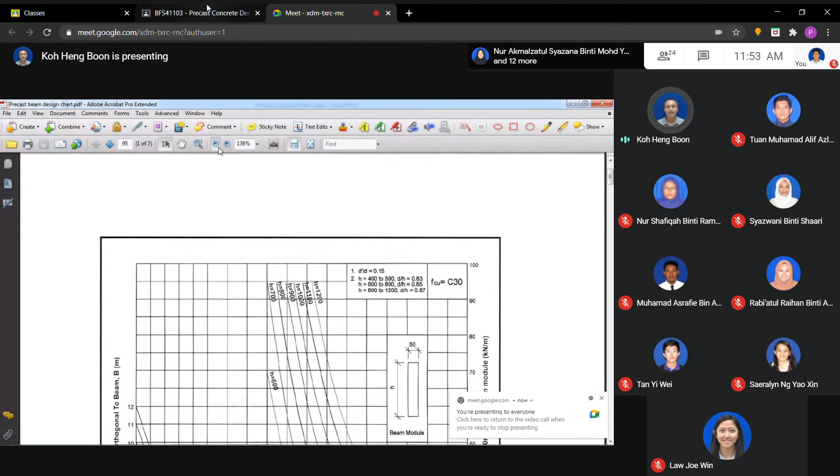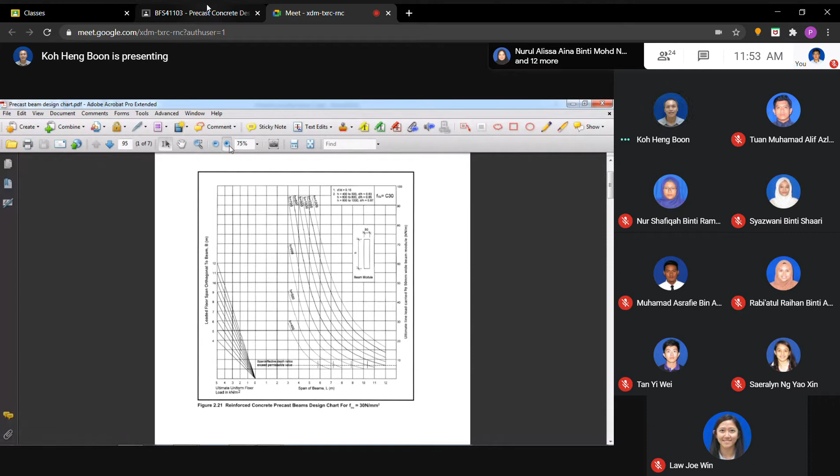There's a handout, these are the design charts. How to use this design chart? First of all, if you look at the design chart and enlarge it - this one is FCU, the concrete cube strength. 28-day cube strength, we got grade 30, grade 35, grade 40, and so on.

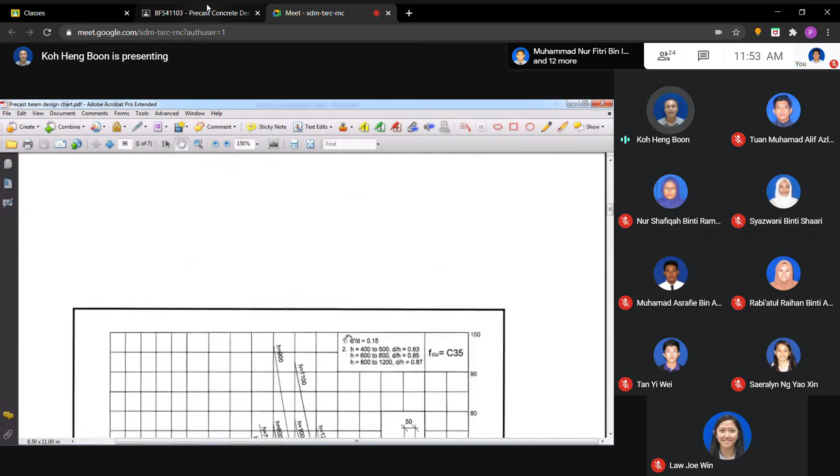And this one is the beam module. Beam module means that here we are all based on, after this, a 50mm module. Based on 50mm here, based on 50mm beam module - it means something like this. After this we get the 50mm. So one way is like this: we are going to estimate, based on 50mm, what load it can sustain.

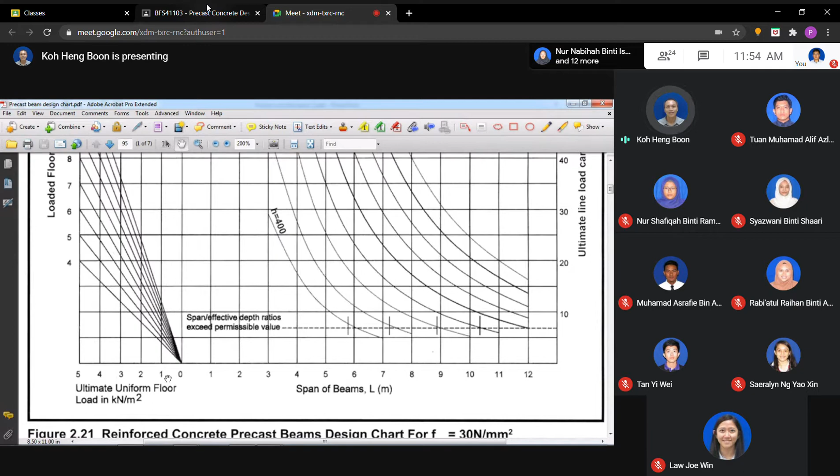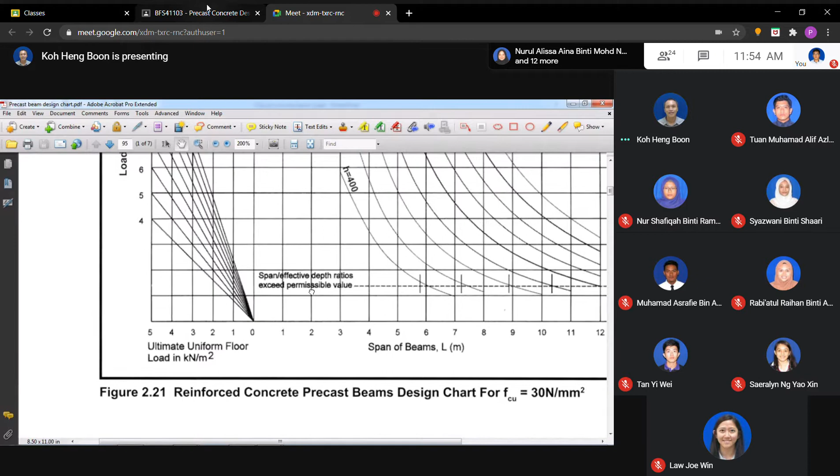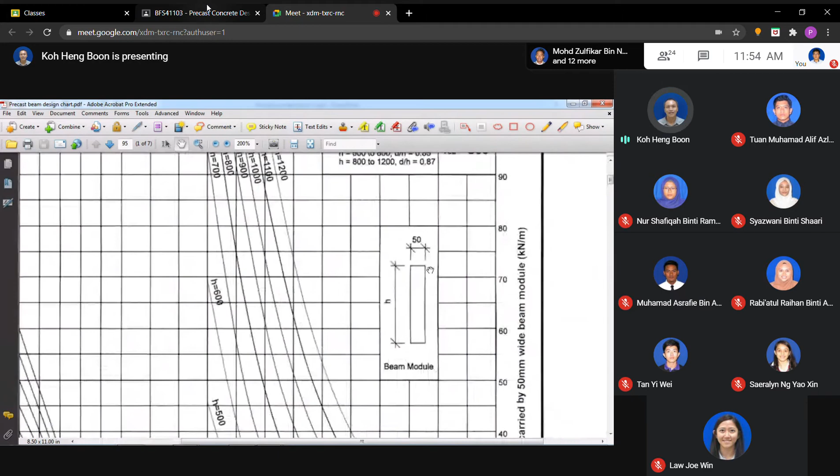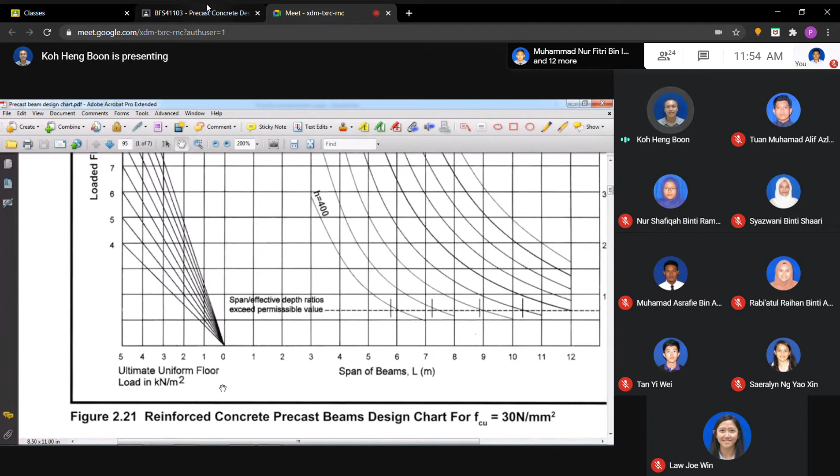Kilonewton per meter square. For example, let's say based on 50mm, at the end you get 1 kilonewton per meter square. So if your load, from your calculations for the design load, is 6 kilonewton, which is 6 times the 50mm beam module - meaning if 50mm can sustain 1 kilonewton per meter square, and the actual load is 6 kilonewton, you have to provide the width. If 50 times 6, the width of the precast beam must go up to 300, that's 6 times. So this is one way we use it.

This is the span of the beam - very straightforward. If the span is 7 meters, then this is the height, h is the depth, the depth of the beam. Let's say the span is 7 meters, the depth of the beam, let's say the depth is 600.

Okay, you got 400, 500, 600, 700, 800. Then go here, you have to know what is this. Actually this one is the floor, your floor, loaded floor span.

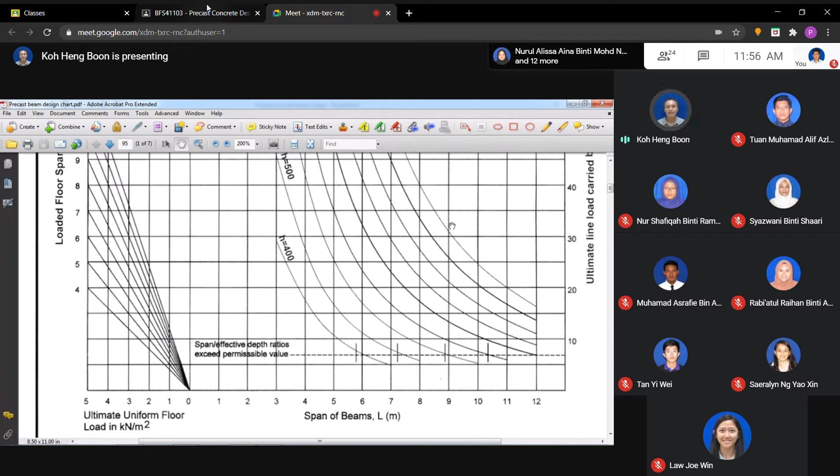You go here, let's say is about 6 meter. You touch here, so you can go about 2 point something kilonewton per meter square. So if your beam is 6 meter, the load on your floor is 6 kilonewton per meter square. So it's 6 divided by this value, then you will get what is the B, the actual B. Okay, so H, this is H, this is H.

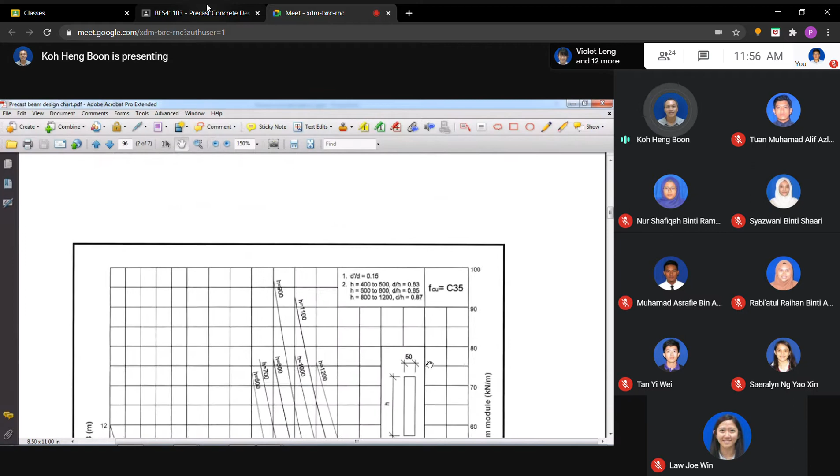Okay, never mind, we will see how to use it. So this one is for grade 30, figure 2.21, then 2.22 this is for C35, grade 35. This is for grade 40, all based on beam module 50, beam module 45, okay, 50.

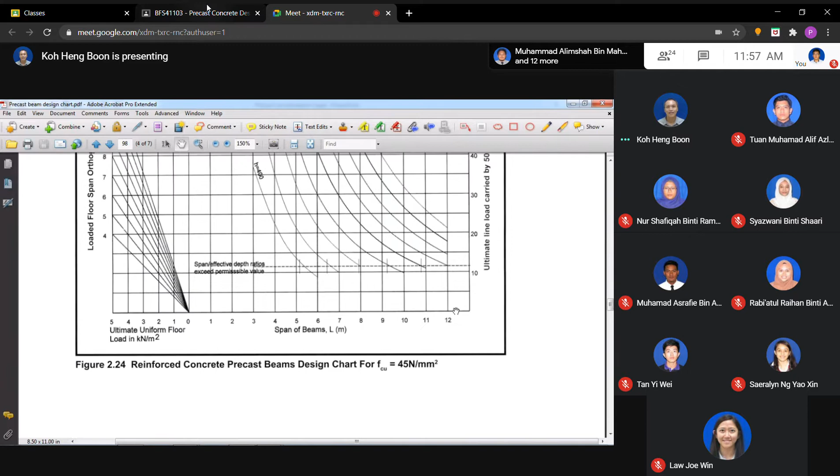And this one, actually either you want to use it or don't want, this one is for what, to get the reinforcement, AS. Once you get the size, everything, actually you can go back to what you have learned.

You then say this is based on normal reinforced concrete, okay, normal reinforced concrete, but actually we cast in the factory. So this one, to get the reinforcement, how much reinforcement we have to calculate M over BD square, FCU, and so on.

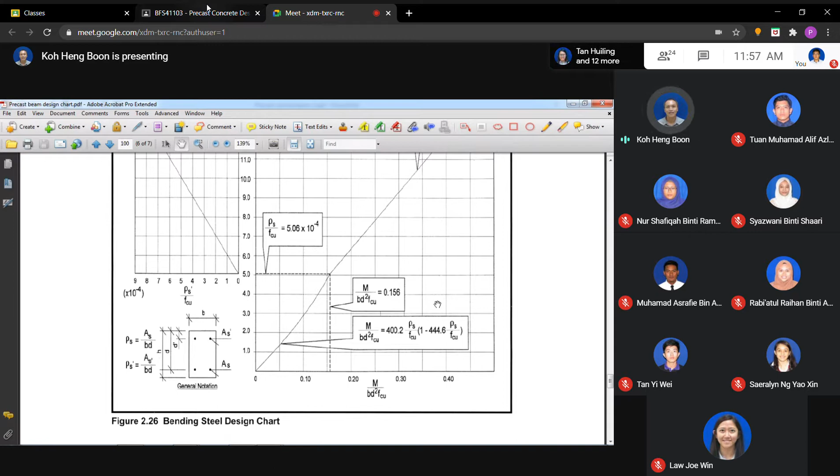But you can go back, actually calculate the K, calculate the Z, and then you can get the AS prime and the AS. But in here it gives you more straightforward, you just calculate the M over BD square FCU directly. You can project it out, and then you can get the percentage of the tension reinforcement, and the percentage of the compression reinforcement required.

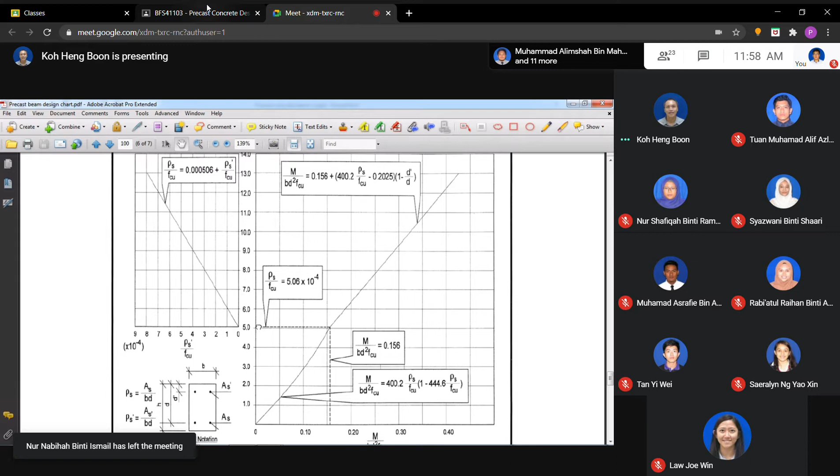Okay, this is the design chart here. Then this is for the shear. This one is based on BS 8110 for shear, to get the concrete shear strength, basically to get the concrete shear strength. Okay, we'll use it, see how.

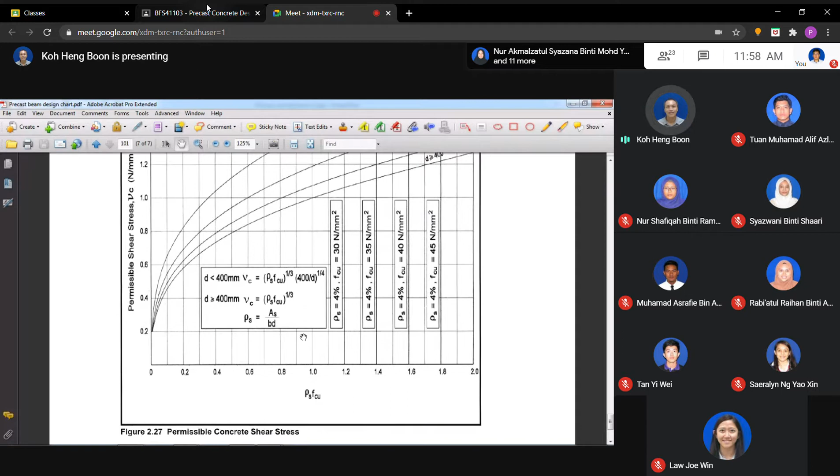After this we'll see how, okay, how to use it. Okay, yeah, basically from 2.21 until 2.25, all are the design chart, for us to get the suitable sections or loading. Then 2.26 is to get the reinforcement, 2.27 is the link, for us to get the link.

Okay, so I have given you this one because in the slide it's a bit not very clear, sometimes it's not very clear here, it becomes a bit small. Okay, a bit small, so now at least today we can look at one example, then coming one we can look at another 2 examples. We target, actually, is it possible by 12:30 we can finish, not drag until 1 o'clock. A bit tired, I'm quite tired here.

Okay, so now let us look at it, let us look at it. Okay, look at this example. We have a floor, we have a layout. Here is the typical layout of a precast building in figure 2, in this figure, figure 2.

And these are the data given, the data given, the design loading. Okay, you look at the floor here, look at the floor here. Center to center of the column is 8.4 meter, is it? But however, the column, the size of the column is 400 mm square.

So the actual span of the beam actually is 8 meter. Okay, if you cast a beam, actually is 8 meter, is it? Because this is 400 square, 400 square. And the spacing here, this is the one-way slab. Either the slab is a hollow core slab, 325 mm thick hollow core slab, plus 75 mm topping.

So your beam goes this direction, all in this direction, and the slab is going to be put in this direction, meaning that it's supported here, left and right here. Okay, so we are going to design one of the span because it's simply supported.

First of all, it's simply supported. We go for a few cases. The first example for today, we go for the simply supported case here.

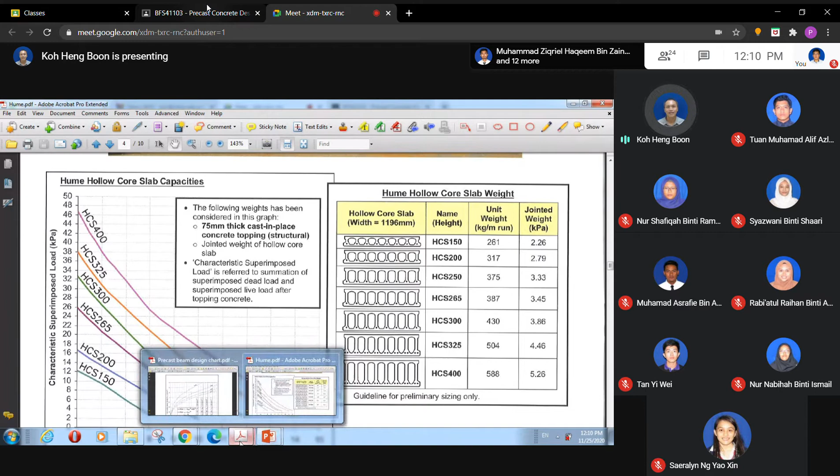Yeah, I think different a bit lah, but it gives you jointed weight here in KPA, 4.46. What you use in this example is 4.5 lah, 4.46 is how to get this value, okay, how to get this value.

So basically this is from the catalog. If you work in a consulting firm, especially when you work outside next time, you have actually a lot of information. Some are actually from the manufacturer, they will provide you. From the catalog, from the handbooks, you can try to find out. So it's not very far different one, okay?

Not very far different. So this jointed weight, just as I mentioned, jointed weight is 4.5, 4.46, is it? So we round off to 4.5 kilonewton per meter square.

Topping 75 mm, based on unit weight of 24. So 75 mm, 0.075 times 24, you get 1.8 lah, you get 1.8.

Finishes 1.2. Okay, given services 0.5 and partition is 1. So the total dead load is 9 kilonewton per meter square. Okay, 9 kilonewton per meter square.

Okay, so and then how to get the depth? Now the depth, no problem already. The depth I already just briefed to you, because we have limited to 700.

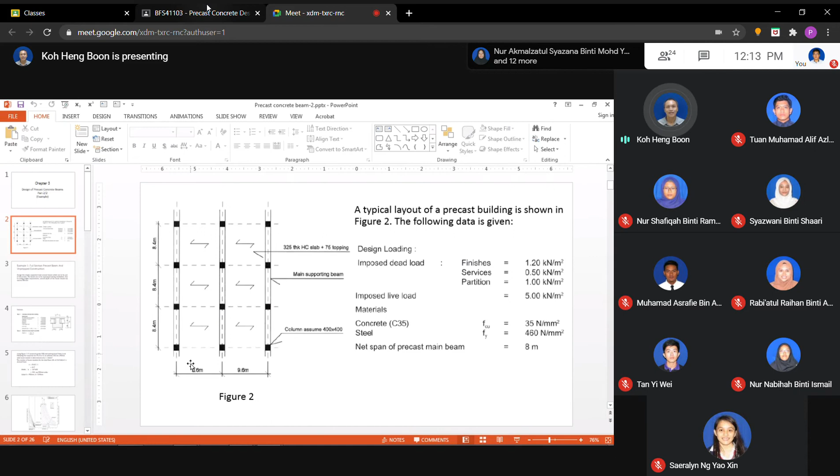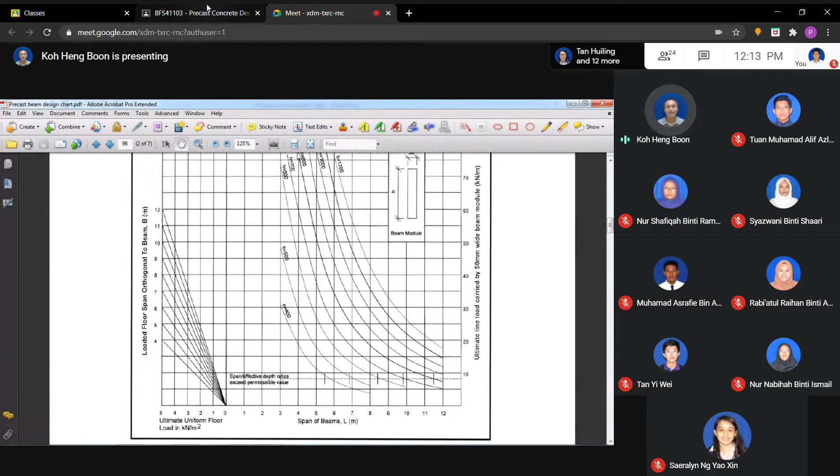So how to go? You go to the table. We only based on 50 mm module. Grade 35, is it? So grade 35 is basically figure 2.22. Okay, figure 2.22. So how to start? You go from 8 meter, is it?

8 meter plus 8 meter is here, is it? And the depth is what? The depth of the beam is 625, is it? The first one is 400. Okay, 500, 600, so in between 600 and 700. So 8 meter, this is 4, 5, 6 here, somewhere here. 8 meter,

625, so 625 you get a point here. Then use the ruler, go here. Where? 9.6. Just now the span, the floor span, the floor span is 9.6. So go up here.

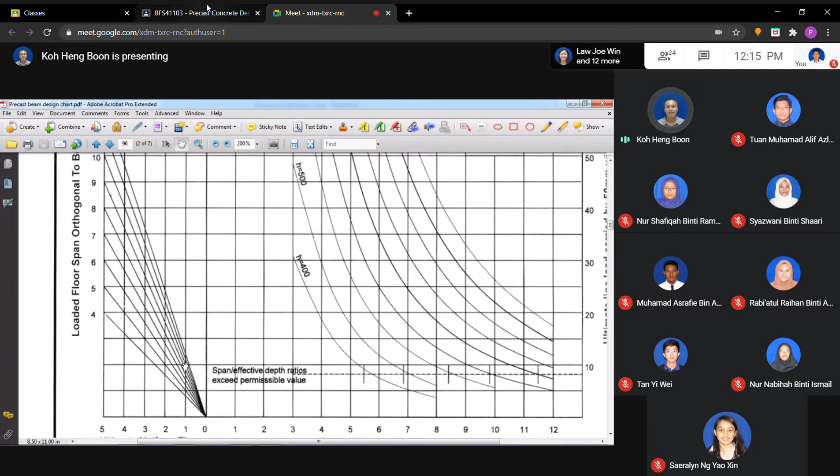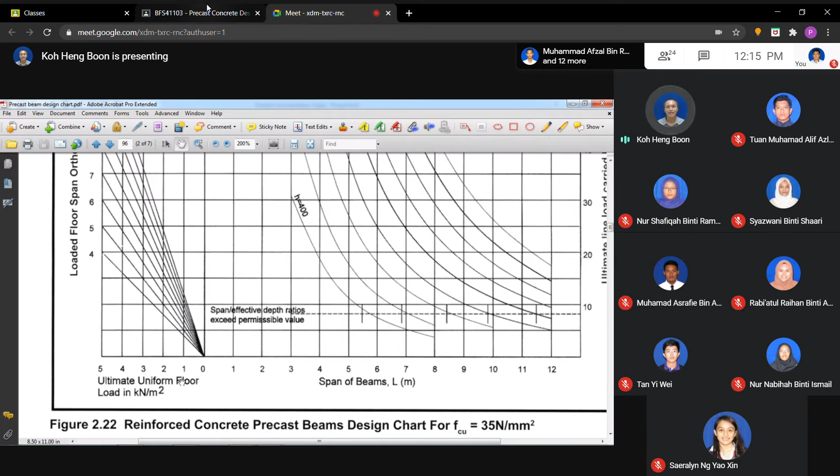Okay, go up here, then 9.6 is somewhere here. You've got 8 on the right, left hand side, the vertical. Okay, 4, 5, 6, 7, 8, 9 there. You touch on it, and then you go down, you get what is 1 point something. I think 1 point something. The ultimate uniform floor load for 50 mm is 1 plus a bit. 1 plus a bit. So we have what?

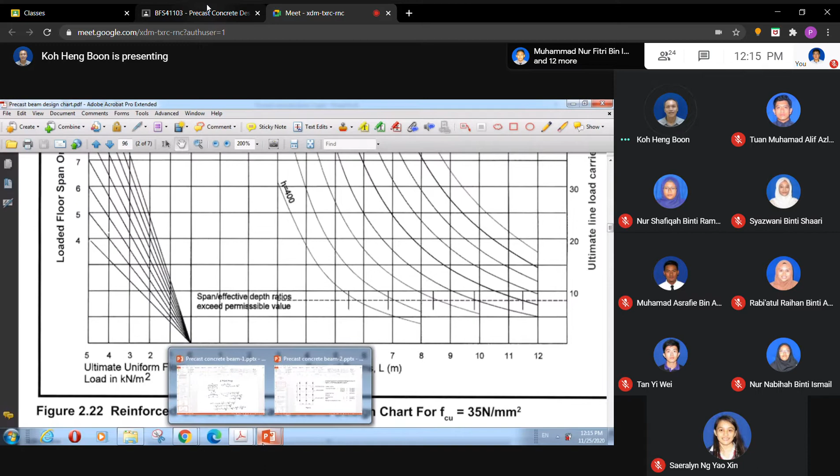The load we calculated is 20.6, based on 50mm. So we have 20.6 divided by what? By the ultimate load, based on 50mm module. So let's say we get a figure, okay 5. Then 5 will be times 50mm each one.

From the sequence just now, A, B, C, D, you get 1.1. So 1.1 here, the ultimate total load is 20.6. So 20.6 divided by 1.1 from the table, we get the value. The N here we require is 18.7. 18.7 multiplied by each one is 50, so it's 935, say we go for 950. Therefore we get the dimension, this is 950.

950. So this table, how to use this table is after this, we use this table the same way. We are going always to use the table. So class, can you get it or not? Before we proceed with the use of the table, understand or not?

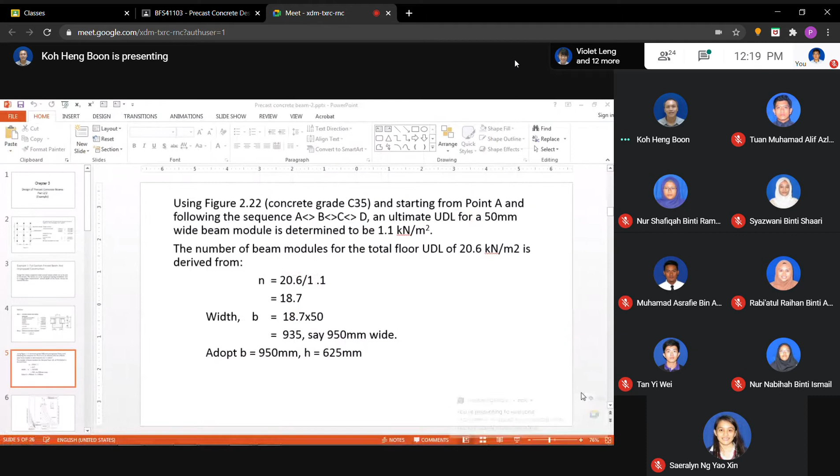So after we get the section ready, dimension settled already, now we want to design the reinforcement. This one I already explained just now because this one is not very clear, that's why I showed you just now the PDF form. So step number 3, we already got the section ready. The next one is we are going to design the main reinforcement and then design for the shear reinforcement. For the main reinforcement, first of all, we calculate.

Now we know the dimension of the beam. We can calculate the weight of the beam, is it? 0.95 times 0.625, okay. We are calculating because it's an inverted T, is it? This is 0, just now this is what we use, 950, is it?

950, we're going to use this one, 950 for the B. So 950 multiplied by 300. Then we have also this part, 150, 2 times 150 times 300, is it? Then we have also 950 times 325, is it? So this is how we get all this. Actually this one is even easier, it's 950 multiply the total depth here, you get this part, rectangular section at the middle parts. Because this is 625 plus this one and this one.

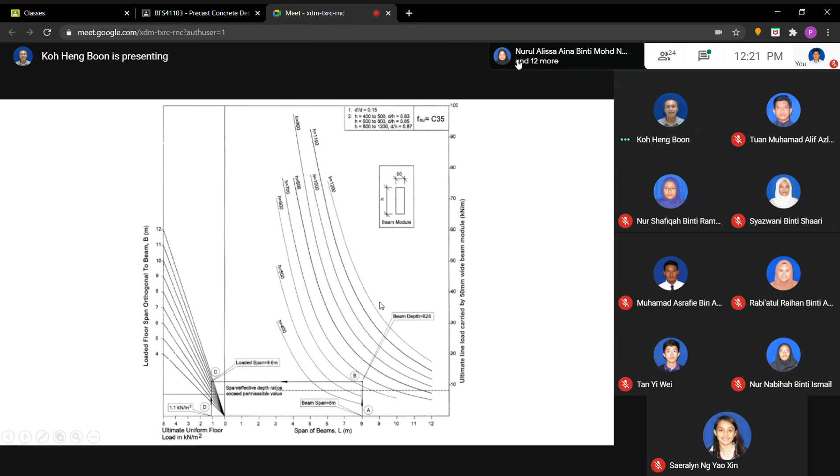So we get 16.41 kilonewton per meter run for the beam. It's a very huge beam, 16.41, you imagine, 16.41 kilonewton per meter run, it's a very huge beam. Consider because it varied the width, the width, because the depth is restricted to 700, therefore no choice here, we have to go wider.

And mid span, and it supports the very long span of the slab, hollow core slab, 9.6 meter. So and mid span is 1.4 GK for the beam, plus this one 20.6. 20.6 is already calculated just now, is it? 20.6 is already factored, is it? We factor 1.4, 1.6, we factor, this is in terms of pressure, is it? On the floor, is it?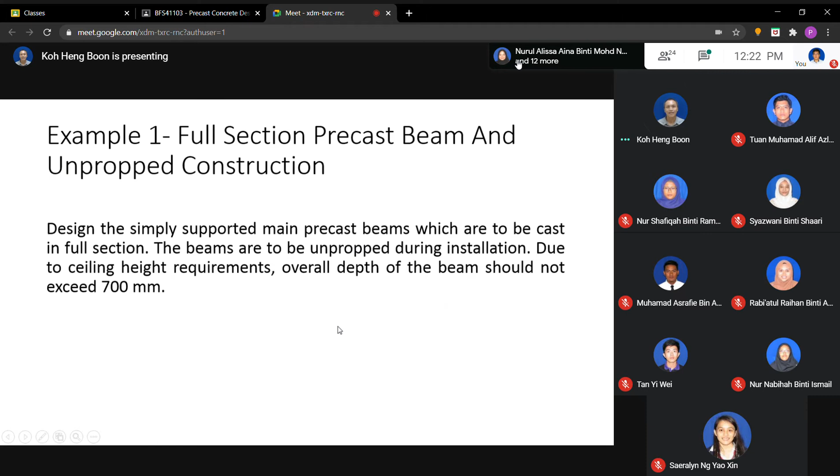So this one, 20.6 kilonewton per meter square. So this is one way, is it? Half go here, half go here. So it's 20.6 multiplied by the length here, 9.6, here half, so altogether 9.6. Therefore you get this one, you get 20.6 times 9.6. Why? Because this 20.6 already factored, so therefore 20.6 no need to factor again. And this one, because it's the characteristic load of the self weight, is GK, so multiply by 1.4. So this is the total W.

Multiply by L square over 8 to get the moment, WL square over 8, where the span is 8 meters. So for the simply supported beam, WL square over 8 gives us a moment of 1,766 kilonewton meter. Very huge moment, you can imagine, very large moment.

The effective height, overall height just now was 625. So minus out the concrete cover and so on, in this case it takes 515. Effective depth is 515.

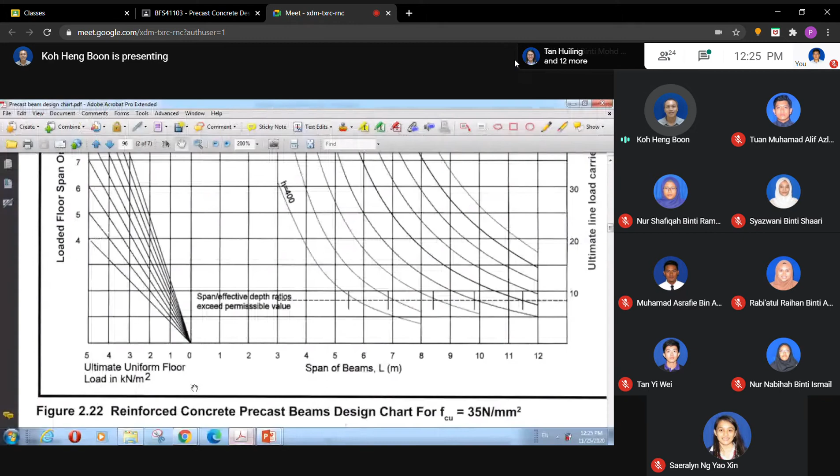So you get 0.2. So how to do it? You go to figure 2.26.

In figure 2.26 we have 0.2 on the right hand side. You go up and touch the line here, the point here, then go to the left. We'll get the rho s over fcu at 0.2.

Go up, touch here, you will get about 6.3 times 10 power negative 4, because this is times 10 power negative 4. Pro S over FCU times 10 power negative 4, so you get about 6.3. And you go further, 6.3, this is 5, 6, 7, so 6.3 here, you go further, touch here and come down.

You get 1 point something, for the 1.25 as given in the notes. 6.3, come here, come down, you get 1.25. This is for rho s prime over fcu, which is times 10 power negative 4. Still remember in your RC design, Pro S is this for tension reinforcement, the percentage of the tension reinforcement, and this is the percentage of the compression reinforcement required. So you get these two values, 6.3 and 1.25, both times 10 power negative 4.

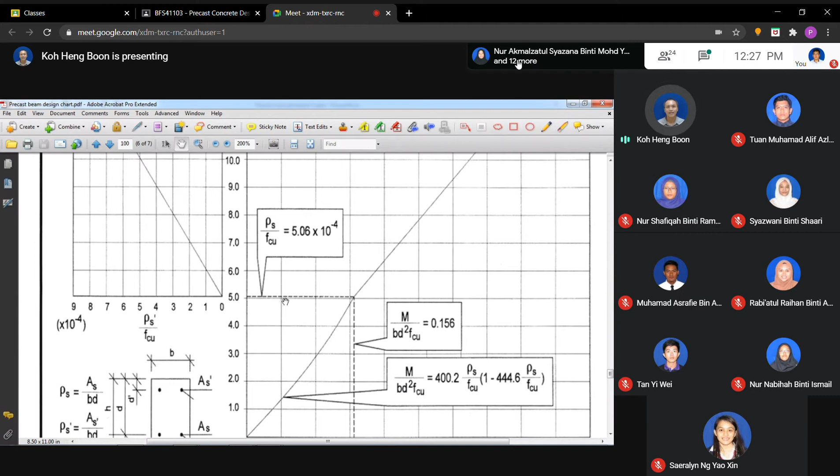Almost finished already, our target actually. Yes, I think before 1 we can finish. So from here we get 6.3 times 10 power negative 4. So Pro S, FCU is 35, times 6.3 times 10 power negative 4. You must have got the calculators. This is 6.3 times 10 power negative 4 times 35, you get 0.022.

0.022. So how to get the AS here? This is the percentage based on BD. So the AS required is 0.022 multiplied by B 950 multiplied by D 515, and you get 10,764. I repeat again, AS is 0.022 multiplied by B 950 and multiplied by 515. We know actually the both, then ignore, we just take the rectangular, that one considered effective.

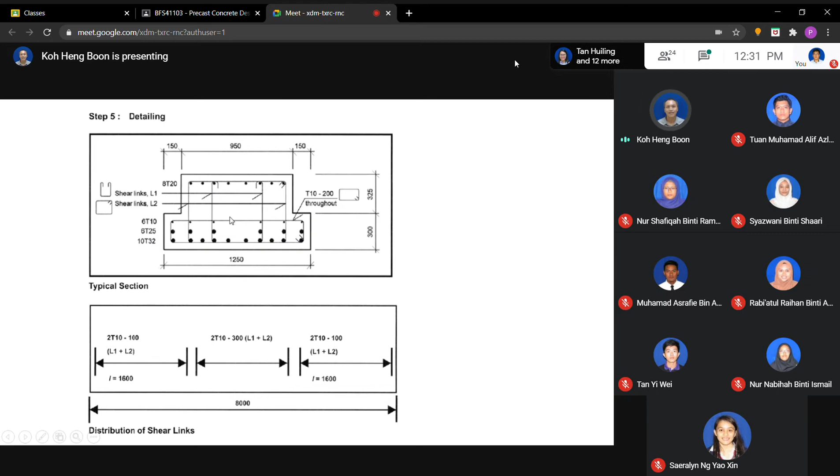So you see actually like this, these are the reinforcement. Just now we provide 10T32, 6T25 bottom bar, 8T20 top bar, something like this. This 8T20 is 1, 2, 3, 4, 5, 6, 7, 8, 8 numbers of T20 bar. This one we got 10T32 bottom part, and top here is 6T25. This 6T10 actually is the additional bar, for additional bar for the side bar, actually to hold the link. The purpose is to hold the link, did not show it here.

Any question regarding this design table to get the steel reinforcement class before we go for the link? Any question? Before we go for the link, design for the link.

How do we get the 515 for the depth? This one is assumed. Basically, if the question asks what is the minimum concrete cover, we have to estimate. This is similar to what you learn in normal RC concrete. We must have the nominal concrete cover, the size of the link, then the reinforcement. Estimate the size of the reinforcement. If they say 1 layer or 2 layer, from there you can get the effective depth.

Okay, thank you. Any more questions? Any questions? If you are clear, understand.

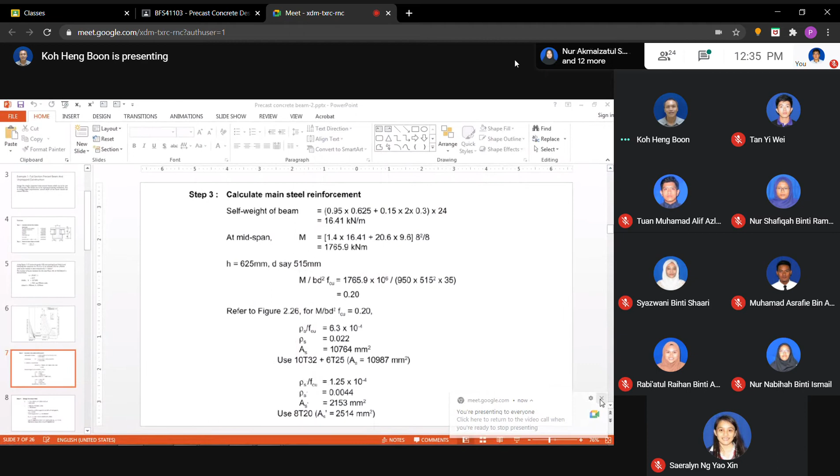Okay, after we get the reinforcement, then we go for the link. Okay, we get for the link. This one, because it's based on BS 8110, the design of the link is actually a bit different compared to Eurocode 2, it's a bit different.

Let me get a piece of paper first. Okay, we see first how actually in the design, the shear design based on British standard. Maybe I have to write something. The problem here is that's why I did not bring my webcam, I have to use, suppose to use, the most easy way, use a whiteboard.

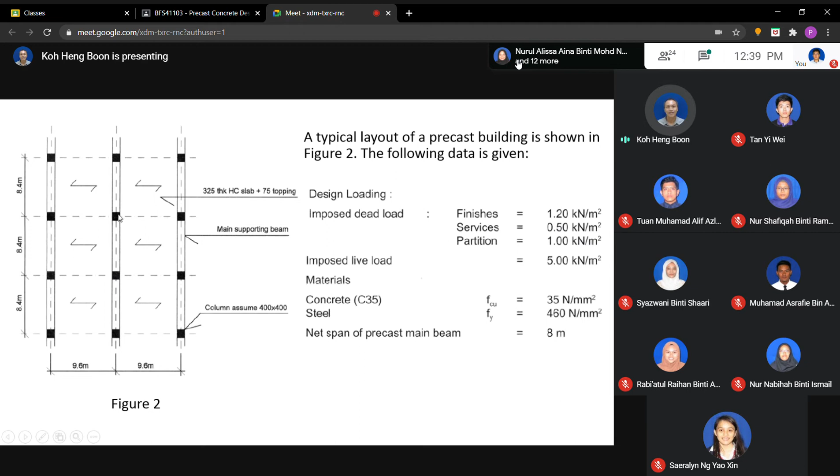20.6 is from here, we are calculating this one. So just now the self weight is half, go here. We're simply supported, is it? So 20.6 we factor, multiply by the length here to become kilonewton per meter run. So multiply by 9.6. And then that one multiplied by 4, is it WL, 4WL over 2? So 8 meters divided by 2. So therefore here you get this one, this is the maximum shear force at support, 883 kilonewton.

Then after that, this is the shear stress, the effective shear stress, small v is V over BD. So V calculated, BD, so we get the shear stress. The shear stress is 1.8 megapascal.

Okay, if you look here, VC basically is 0.79 divided by gamma M. Gamma M is the partial safety factor for material for the concrete here. Okay, for shear, basically it is 1.25.

So from here, we get the concrete shear strength without the shear reinforcement. Okay, so from here, now, okay, so here, so from here, how now we are going to use the table.

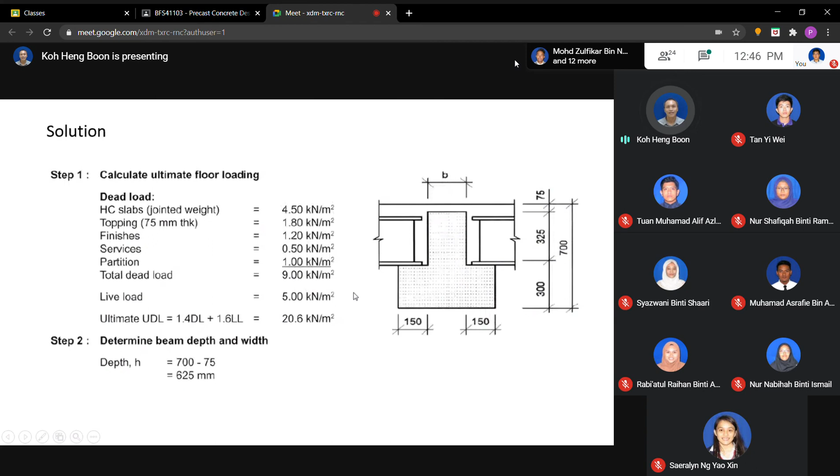Okay, so now we are going to use the design chart. Okay, assume now in this case, assume we got just now the main bar, the main bar that we provide here is very huge, is it? Required here is where is it?

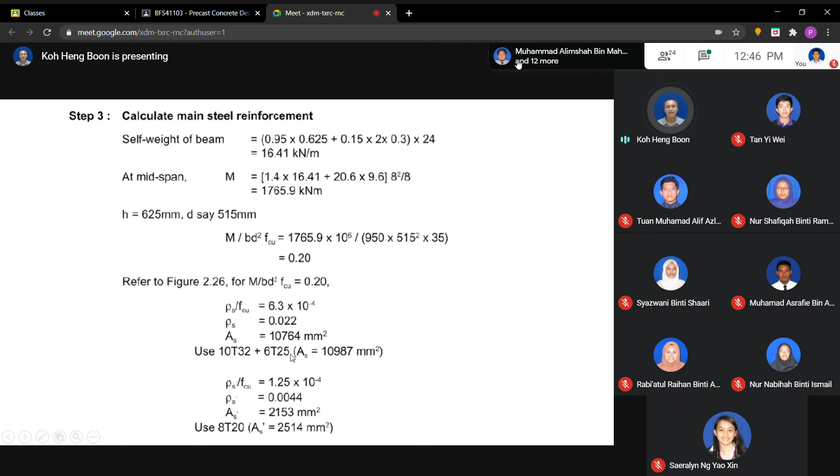10T32 plus 6T25. But we are assuming that now the curtailment, we are not going to use all the bar extended until the end. So assume only 30%. Okay, we assume only 30% here.

Okay, yeah, so assume 30%. So we calculate the Pro S FCU. So the Pro S FCU here. Pro S means that 30% Pro is a percentage, is it? So 30% Pro S, just now we have calculated, how much? 0.022, is it? 0.022 multiplied by 0.3, 30%. So this value 0.022, multiplied by 0.3, multiplied by FCU 35 here.

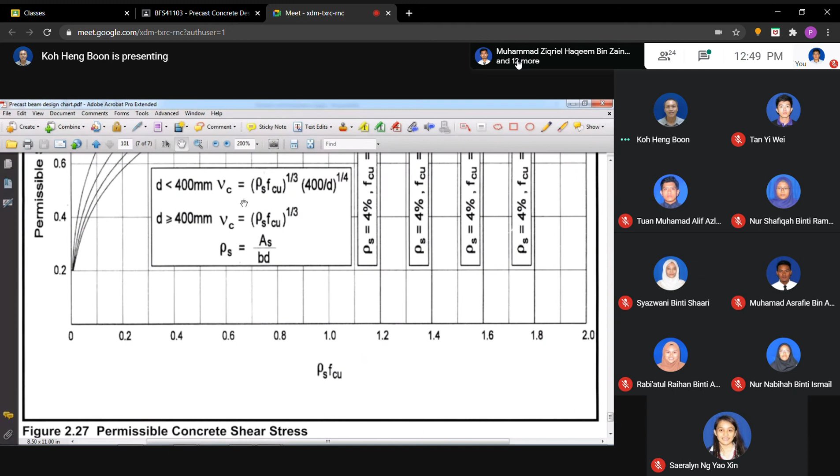So you get 0.231. This is how you get this figure, this value 0.231. So remember, we need to calculate the Pro S FCU here, okay, and this one assumes 30% of the bar at the support only uses 30%. So then we go to figure 2.27, the last figure. Reduce size.

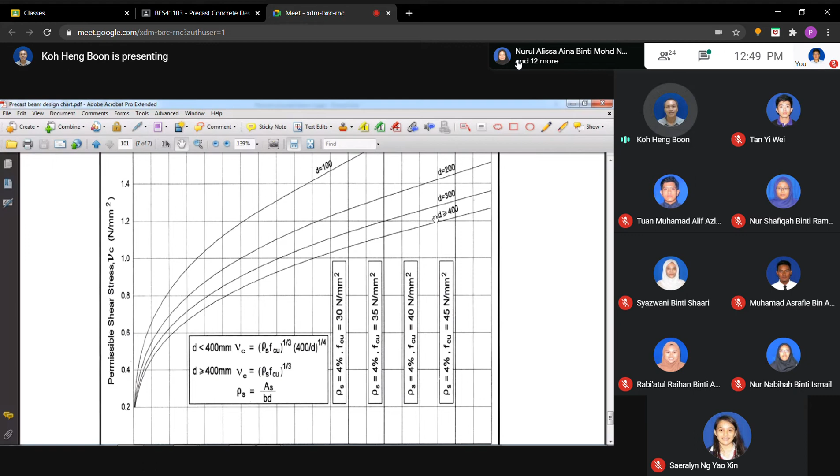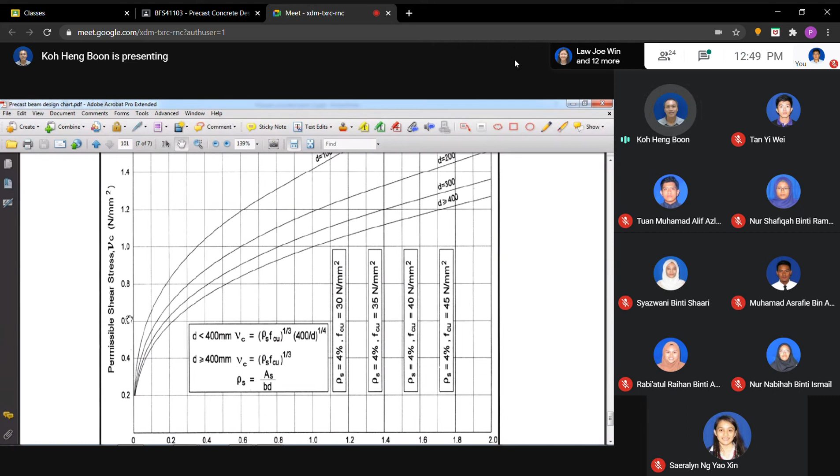So Pro S FCU is 0.231. The D is 515, greater than 400. Based on this curve, 0.231 somewhere here, projected out, touch here at greater than 400, and then go here. This is the permissible shear stress, actually the shear strength of the concrete without the link. So it's about 0.61. In the notes it's stated here 0.61, so that's where you get it.

Here after this is the equations, how to get the spacing. This one, there is a problem. I don't have the whiteboard. I want to show you the difficulty. They have actually three types of design. If V is less than or equal to 0.5 VC...

I can say no link is required. I will write it on the paper. But this one we use for a main beam, we still use minimum link. So this is the first case.

Case number 2, greater than 0.5 VC, but less than 0.4 plus VC, so nominal or minimum link. Let's say the third case is when 0.4 plus VC is less than this, but less than 0.8 root FCU or 5 megapascal. We go for design link.

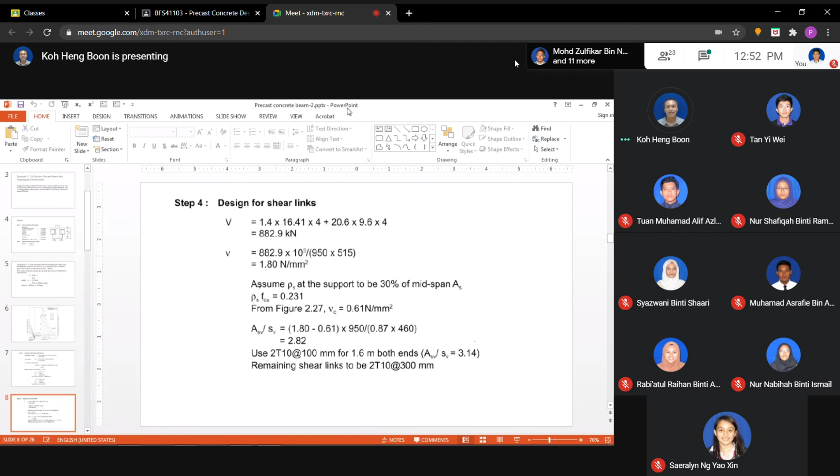Class, wait, hold a minute. I think hopefully we can finish before. Okay. You look at here. Is it clear or not? Can you see or not? I try to enlarge it.

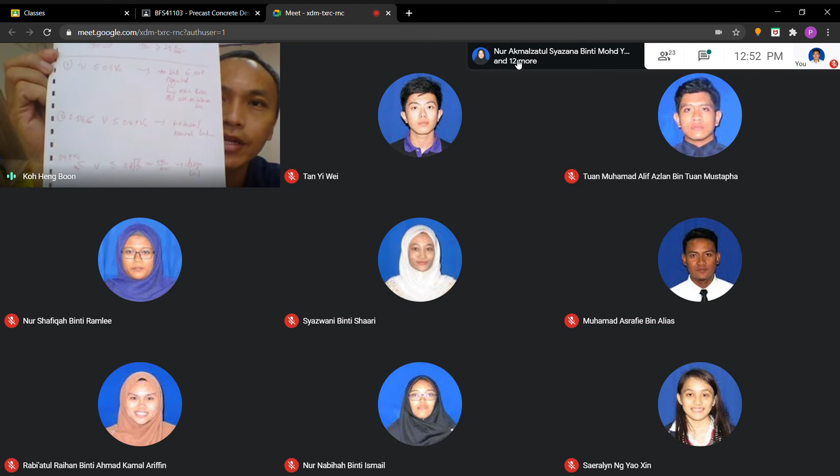If you look at here, this one is the 3 cases. VC, you already calculated, and we already also calculate the V, the shear stress, V over BD. Just now we get how much? V over BD, we get 1.8. VC from the table, you can base it on the table, or you can use the equation: 0.79 divided by gamma M, 100 AS over BD, 400 over D, and FCU over 25, to get the VC. Then we can compare.

We have the 3 cases, all stated in the code of practice. In the first case, if the design shear stress V, which is 1.8 here, is equal or less than 0.5 VC based on theory, theoretically we are not required to provide the link, shear reinforcement is not needed. But however, for a main beam, we're still going to provide the nominal or minimum link, this is widely used.

Second case is when the design shear stress V is greater than 0.5 VC, but less than 0.4 plus VC. 0.4 plus VC, how much? 0.61 just now. 0.4 plus 0.61 is 1.01. So if the design shear stress V over BD is in case number 2, then we go for nominal or minimum link. Nominal or minimum actually mean the same thing.

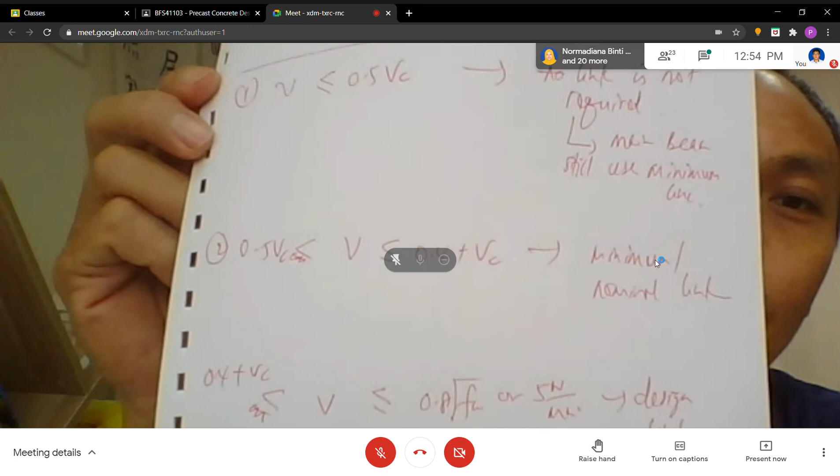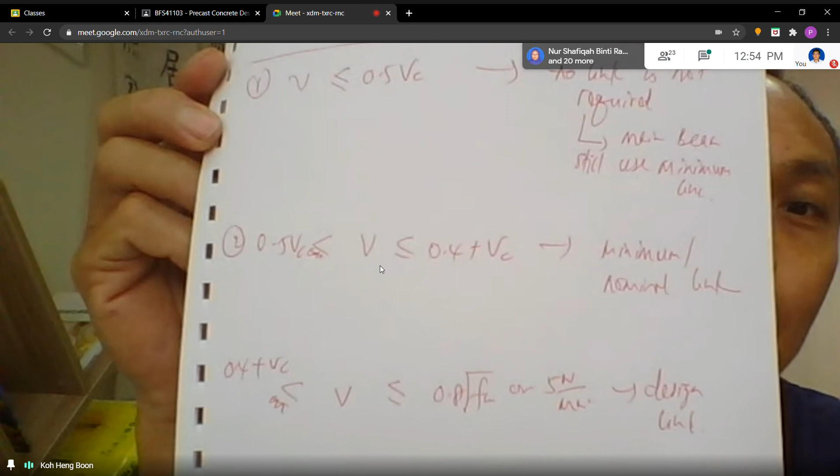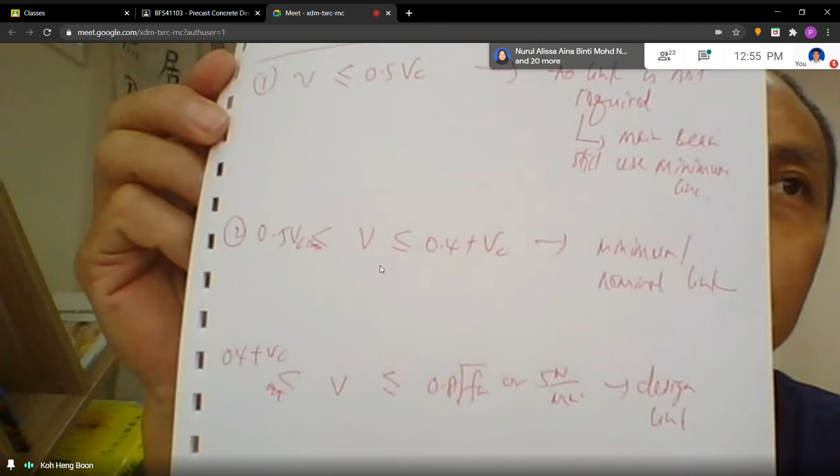Okay, to get it I will write some more. You wait for a moment. For nominal link or minimum, I simplify the equation. It is V equal to, because this is actually using 0.87. Actually some are using 0.95, depends on the edition.

Let's say design link, design link is SV is... I think it's not mistaken, is this one. I think so. I have to check actually, I believe in my mind, in my memory is this equation.

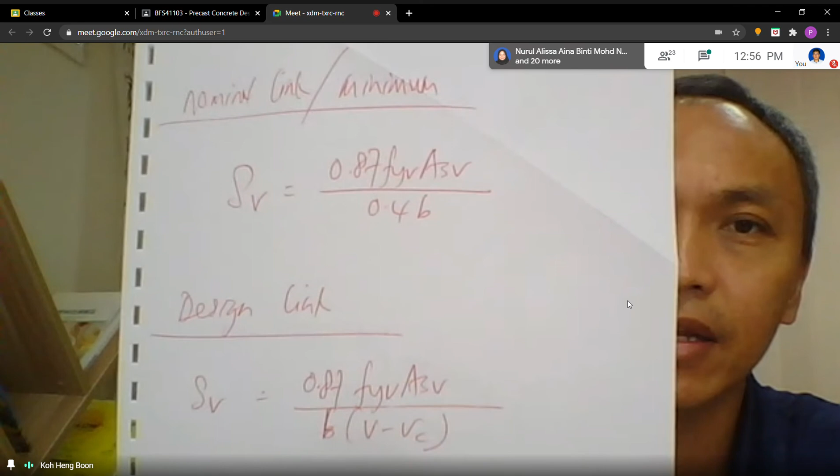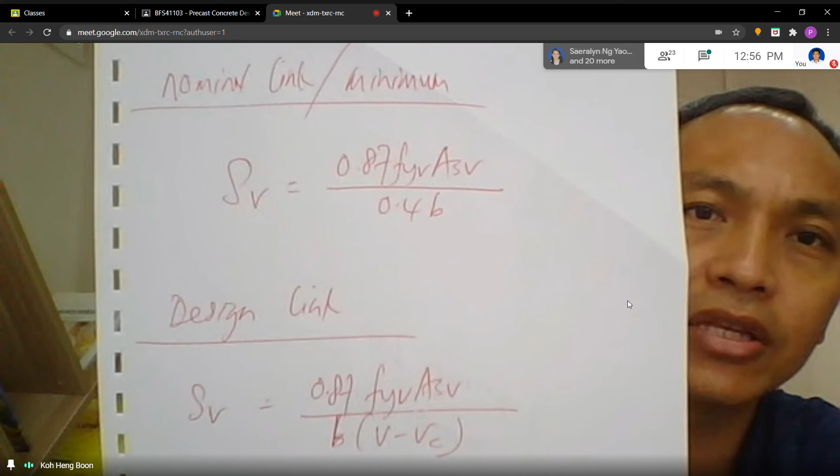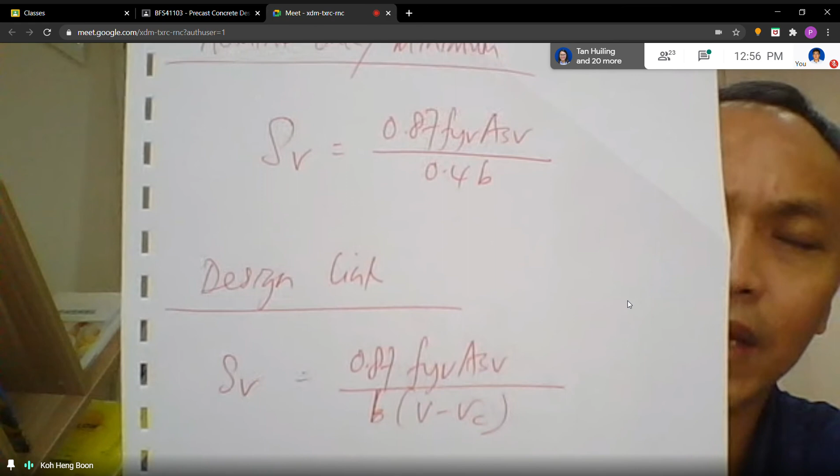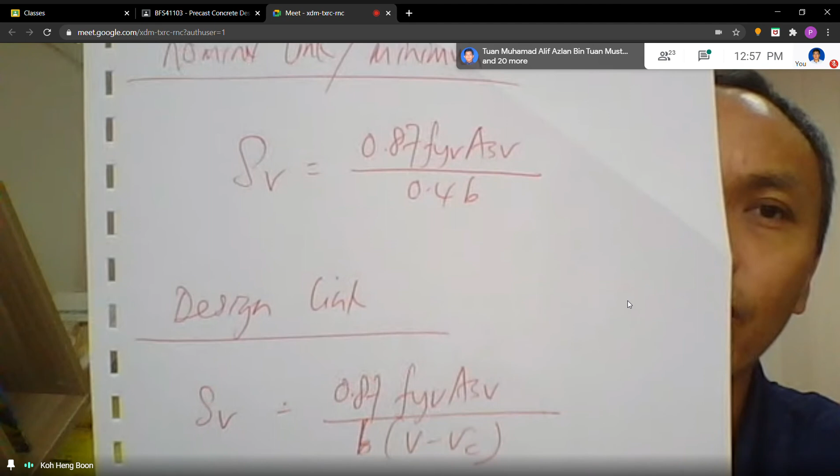For nominal link, the SV is 0.87 FYV. FYV is the strength of the link, either 250 or 460. ASV is the area of the link, the leg, the cross section area, you cut it into how many legs, like what you design in the normal reinforced concrete. Divide by 0.4b. Then for design link, it's 0.87 FYV ASV, 0.87 or 0.95 depends. Some versions use 0.95 because we reduce the partial safety factor for the steel reinforcement, because 0.87 is because the steel reinforcement we use 1.15, 1 over 1.15 gives us 0.87. If we reduce to 1.05, it becomes 0.95.

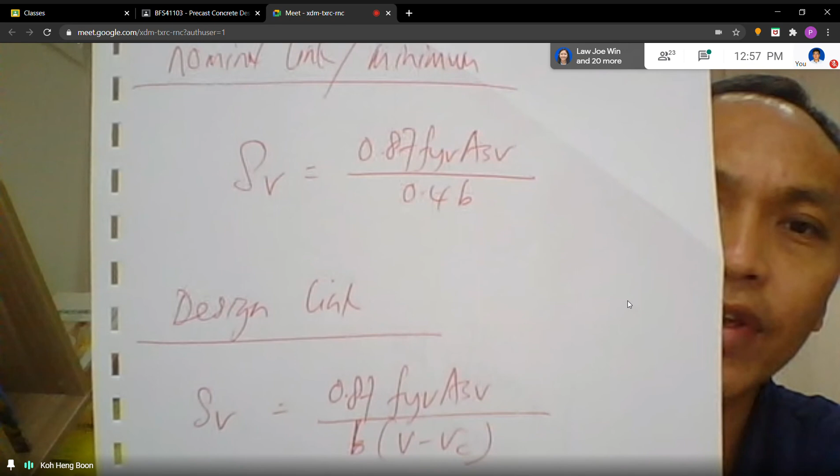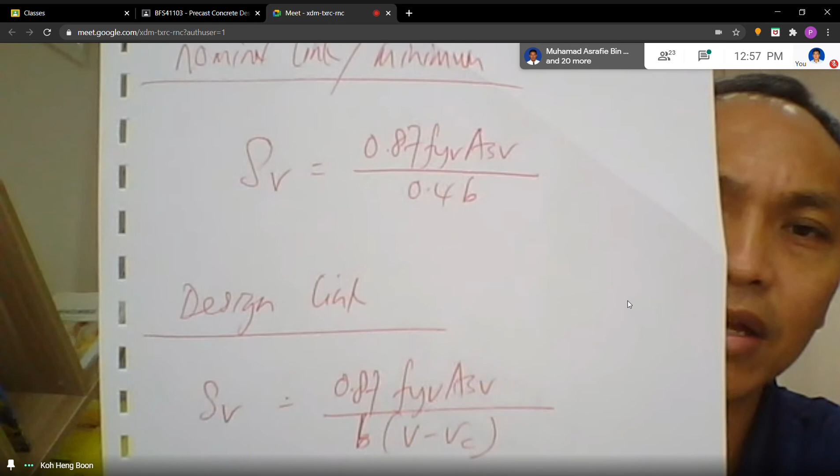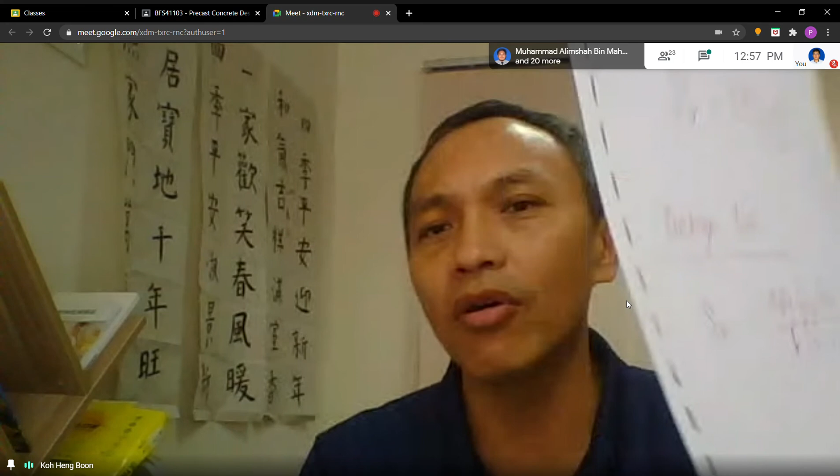B, the bottom part B, V is the design shear stress, V over BD just now, minus the VC. So these are the equations we use to design, if we calculate based not on the table. However, now we are using the table. If we use the table, something like this.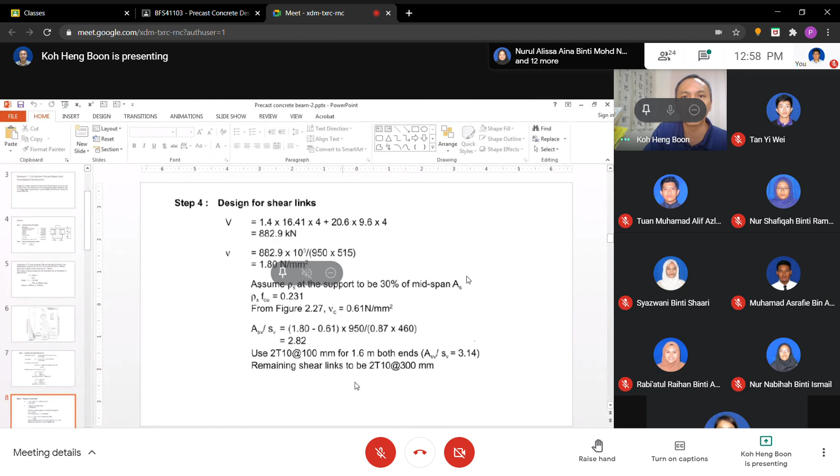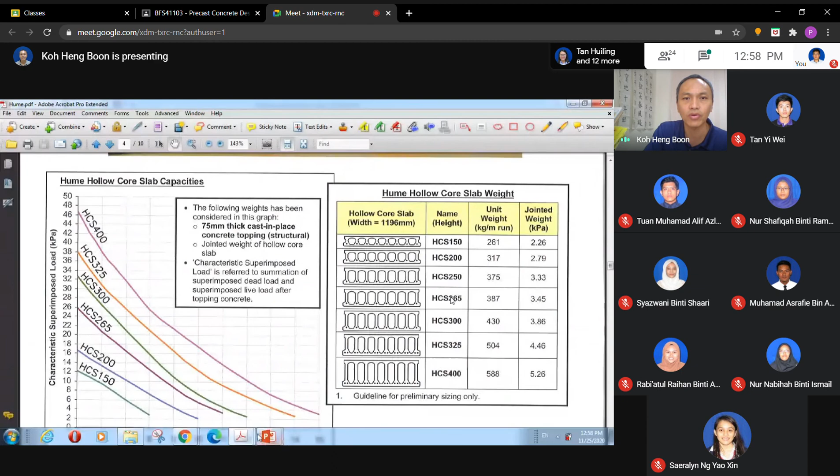We got this one, we see already done, is it? So after this, just now we go to the table. Not this one. Okay, we go to the table. Wait, let me see. Oh, not the table. Sorry, not the table. We go to this one.

Okay, once you get the VC ready, you can actually substitute. Okay, SV, you see carefully the equation just now.

SV is bottom part, is it? 1.8, this is SV. So if I write it, FYV is 400. You use 460, ASV, yeah. Plus, you have to be careful, ASV, because you are using doubling.

Last time we used T10 100 or H10 100. 10 is 78.5, is it? So if T10 100, so you cut it, you get 2 legs. So 2 legs means the ASV becomes 157, 78.5 times 2.

But now we got doubling. Doubling means here you got one link, another link. So you cut it, you will see 4 legs. So the ASV here is what? The ASV here is 4 times 78.5. So you get 314. You get 314.

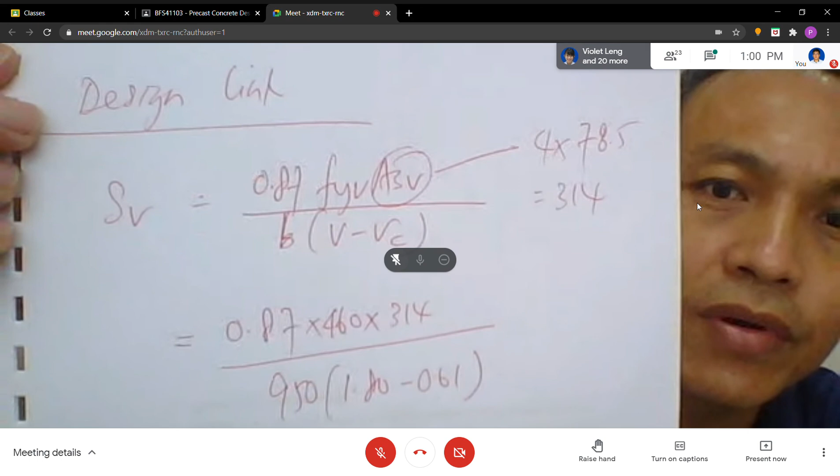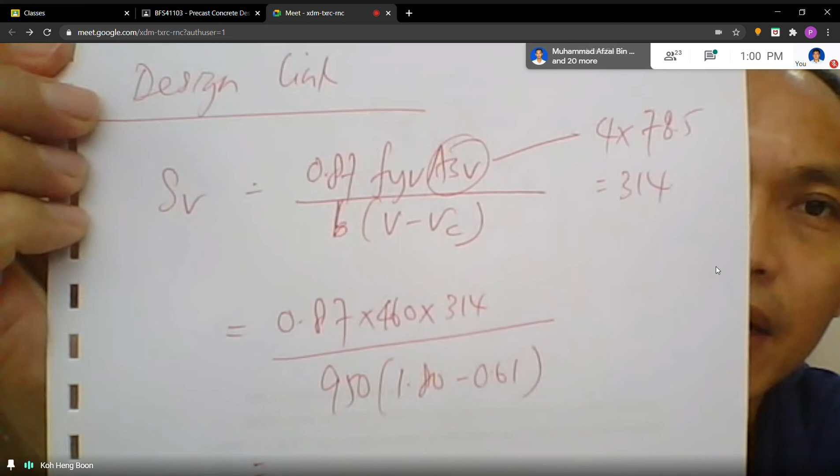Maybe I can show you here. Please calculate for me. Okay, please, if we substitute in this equation, we substitute in this equation. Can you please calculate for me what is the SV? What is the SV? 100 plus, is it? Anyone can calculate and then place on the mic and tell me what is the value.

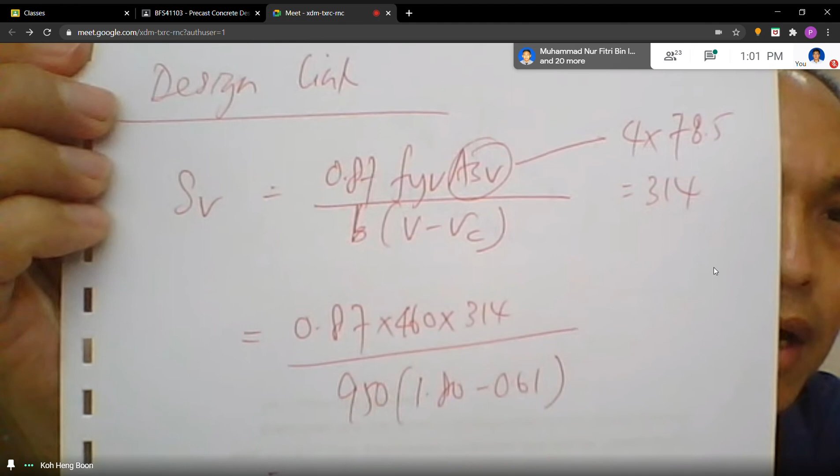111, is it? I think it's 111, is it? Yes, yes, 111. So you get 111 mm. So 111, then...

Sorry, because I did not bring the...

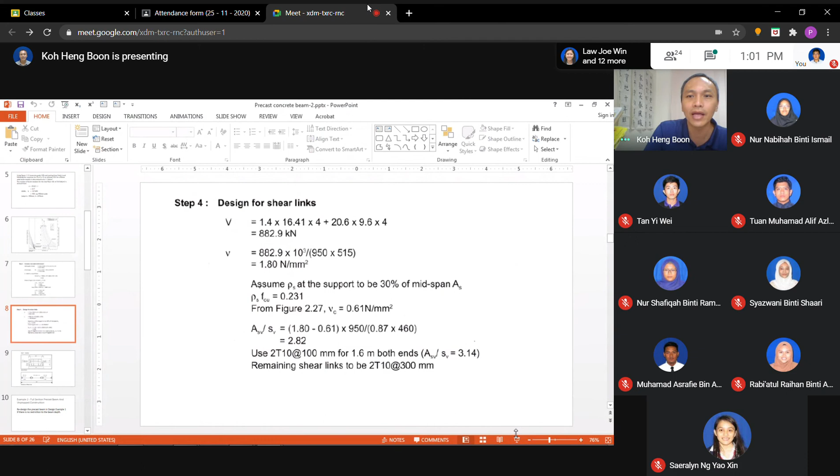So from here, actually, this one is you calculate ASV over SV, then ASV is 314, ASV is 314. So at the end, you will get 111. So 111, we provide closer, we provide 100 mm, we provide 100 mm.

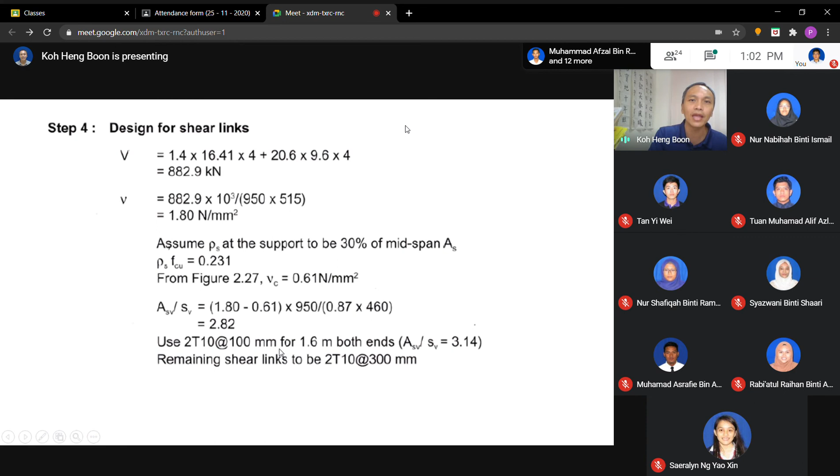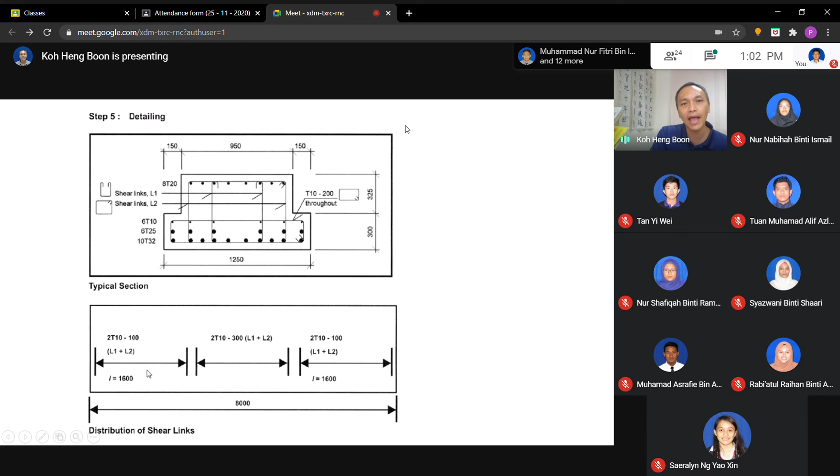Okay, 100 mm, and the remaining is at the both ends, because the shear is higher at the end span, and at the middle span here we just use minimum link. We use minimum link.

Minimum link is what equation? SV is 0.87 FYV ASV divided by 0.4B. I think you'll get 300 something, is it? So it provides 300. So this distance here, how to calculate?

Is based on 2T10 300, to get a value here, a distance. It means that 2T10 300, it can sustain until how much of shear force? Okay, this is the distance. They got the way to calculate.

We can actually simplify, make it more conservative a bit. We can simplify based on the minimum shear stress. 0.4 plus VC, that one is not the minimum shear stress, 0.4 plus VC multiplied by BD. Then to calculate the distance here, you will be a bit conservative, you'll extend a little bit. Okay, but that one I think maybe I'll show you next week.

So at the end, we have the main reinforcement here. We got main reinforcement here, then we got the link. The main link, actually this is the one, the first one is the main one. Second one is the link number 2. Therefore, we get 2T10 100. This one actually we did additional link to basically hold the slack of the reinforcement for the bottom part for the boot here. Okay, T10 200 here throughout along the beam.

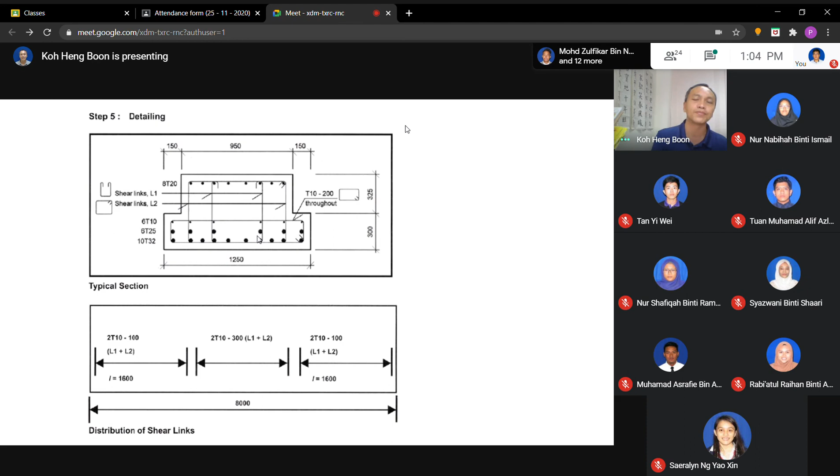Okay, after next week I'm going to continue with example 2 and 3. Example 2 and 3 will be faster because example 1, we have to refer how to use the table and so on, I have to guide you first. Example 2 and 3 actually use the same table. We're going to use the same table. And I will show you also how to get the distance, this one, how to get the distance.

Okay, so I think today we stop here. We stop here.